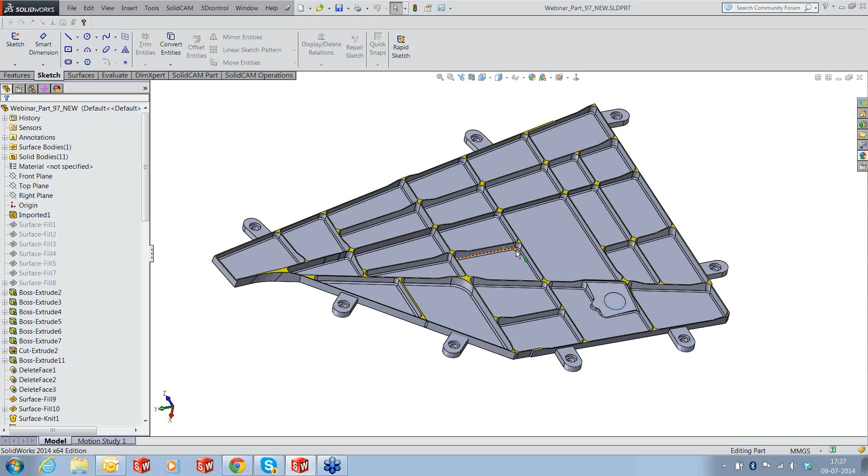You will also notice that I have colored the rib tops with a particular color, and this is for doing easy selection, which we are going to see in SolidCAM. It's a new thing where we're going to select surfaces by their color, so it becomes much more easier to select, and you don't spend a lot of time selecting these surfaces. Okay, let's start with new milling.

Yep. Yes. Okay. So let me.

We're going to use a Burmac, the Spanish machine, with a Siemens 840D controller. It's a head type machine.

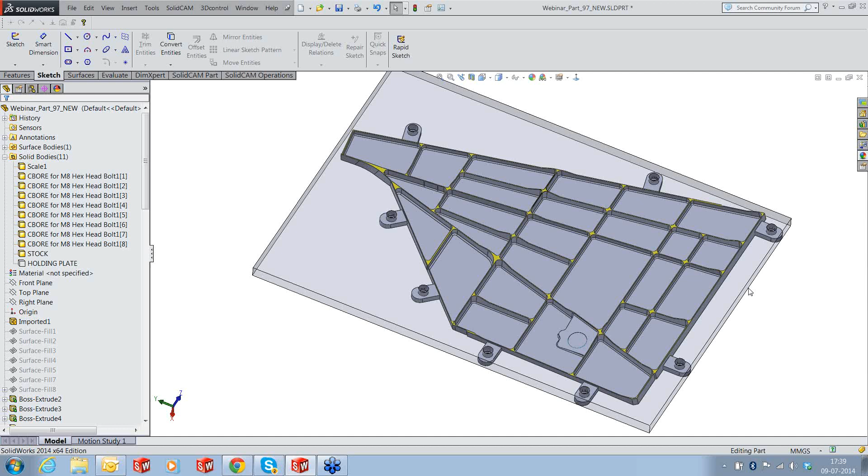So let me select Siemens 840D and set my coordinate system top of the center. Flip around Z. That should be my first coordinate system.

Put some values up here, 150, 25, okay, accept it. So we have our first thing done already.

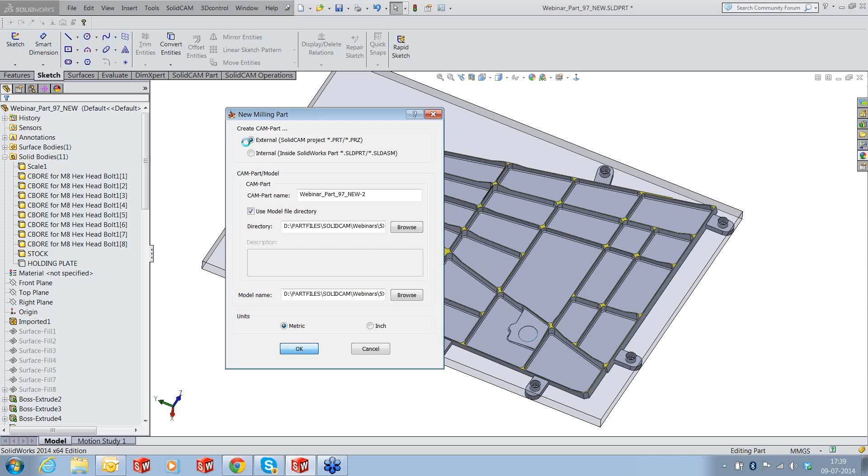We have set the coordinate system, and you can see that the target and stock are already defined, although I don't know what they are. We can always go back and change this.

Now, since we are going to use iMachining, I need to set some of my parameters for iMachining, like the machine. Then we have the material, etc. So I'll accept this.

I'll exit for a moment because I just need to change the version. Okay, just a moment. Again, please.

Okay, let me open the same part.

I have now defined my coordinate system and stock and part, but we just need to recheck. So I'm going to check the stock again. A lot of solids have been selected. We don't need them. I'll unselect all, and I'll only select this particular CAD data with a tolerance of 0.1.

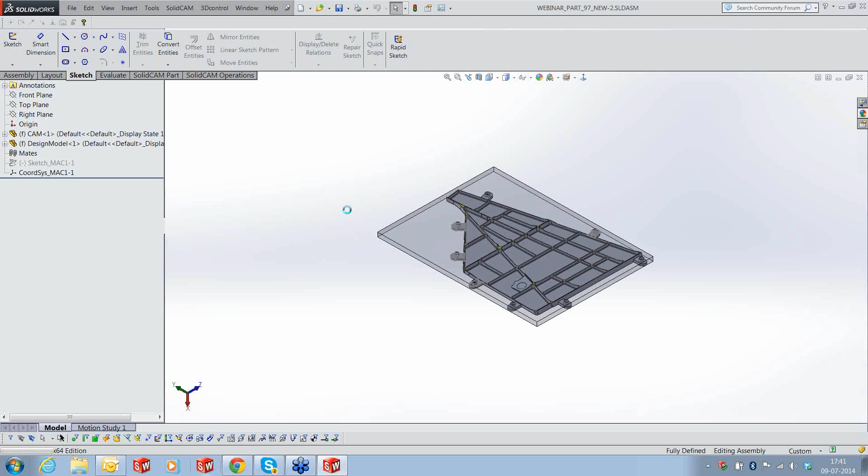Right, so we have already done the target, stock, and coordinate system definition. All we now need to do is select the right machine, so we're going to select Burmac.

It's the head gantry type machine for such big parts, which has a maximum spindle RPM of 12,000, a maximum feed rate of about 12 meters, and a spindle power of about 22 kilowatts.

We're also going to use aluminum 6061-T6. This is aerospace grade aluminum. So we are going to use these two things, the machine Burmac and 6061-T6.

So I've already set the parameters for iMachining. Now what I'm going to do is switch on again my stock because now I'll need it for my first operation. My first operation is actually going to be clearing out the material, not from inside but from the outside. I need to remove the material from outside.

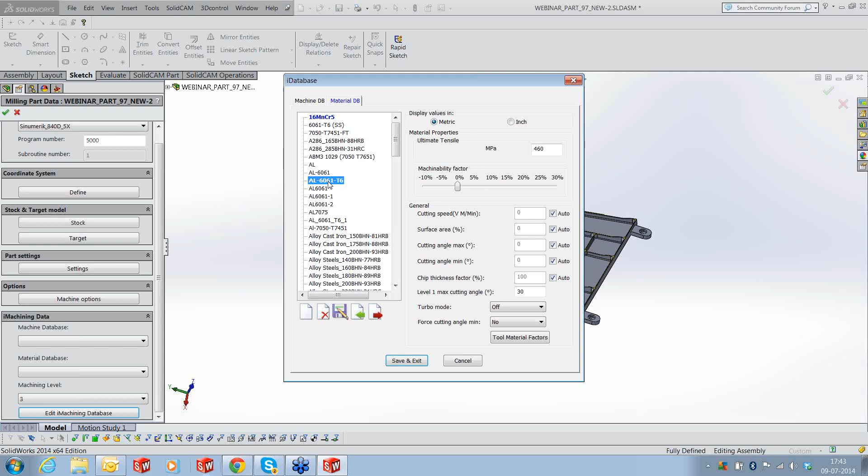So I'll add a 3D iMachining. In this case, it's not going to be the target because I need the lugs back with me. So I need to define the material other than the lugs.

So I'll just hide for a moment the stock and define a new target. This is going to be a local target. It's only going to be valid for the function where it is selected. It's not a universal target.

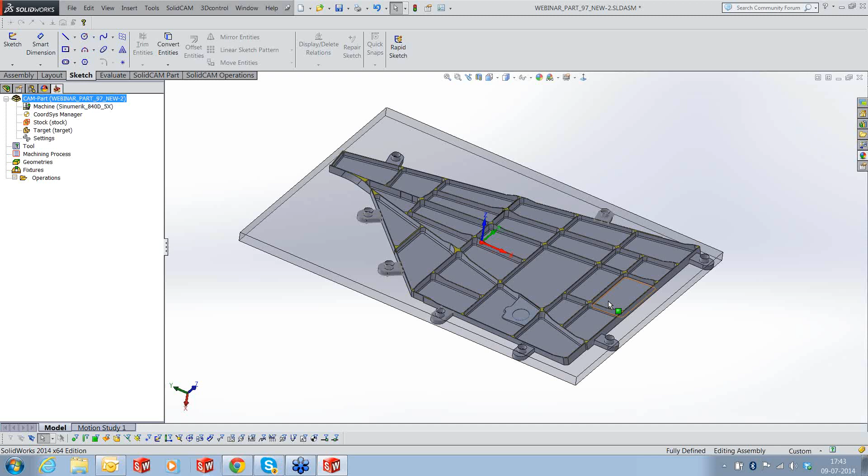So I'm going to select all the lugs, selecting all the lugs together. These will form the part of the material so that we don't end up removing the lugs. It's needed for us.

Okay, I'll select the tool. For this operation, I'm going to use a 20 millimeter end mill, 60, this is 50 and 35. It's a 3-flute end mill, 45-degree helix. Let me change it to 35 degrees. Holder: I'm going to use a HSK 63 holder. That's how my tool looks like.

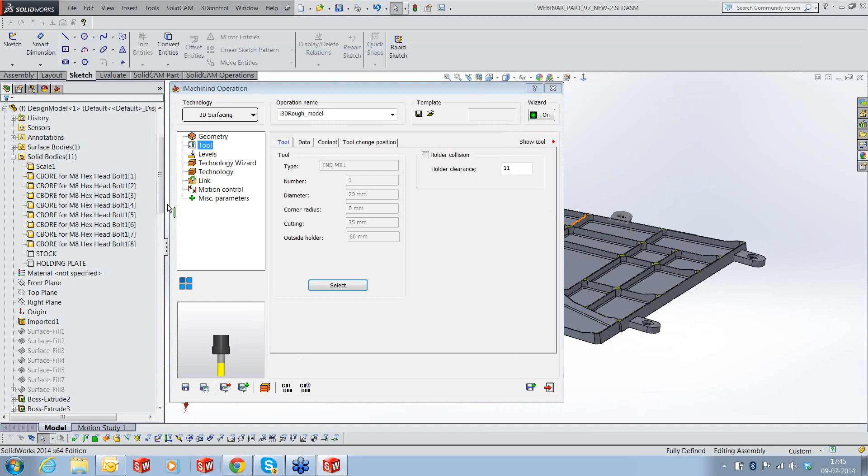Okay, right, now let's get the stock back again because in the geometry, since I want only the outer portion to be machined, I need to now tell iMachining that I just want the outer area to be cut. So I'll define a working area.

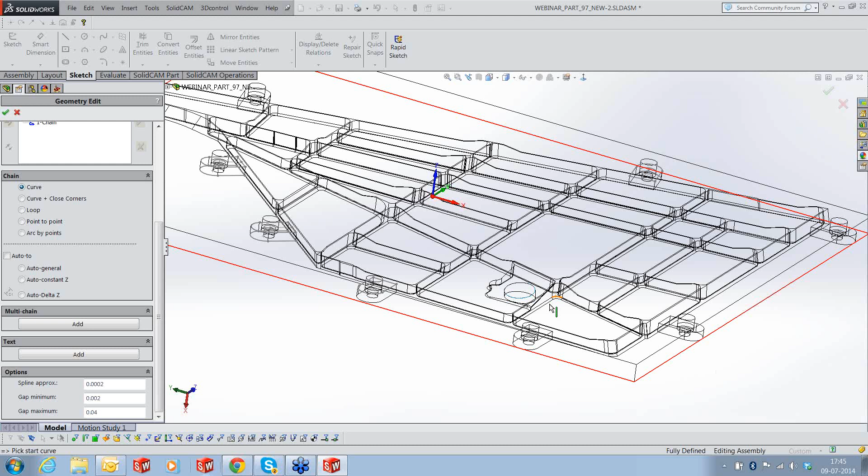Constant Z. Go into the wireframe and select the innermost curve. Again, constant Z. So we have two curves selected, the outer and the inner. The area between them is the area to be machined. And the outer curve can be marked as open because the tool can approach from outside.

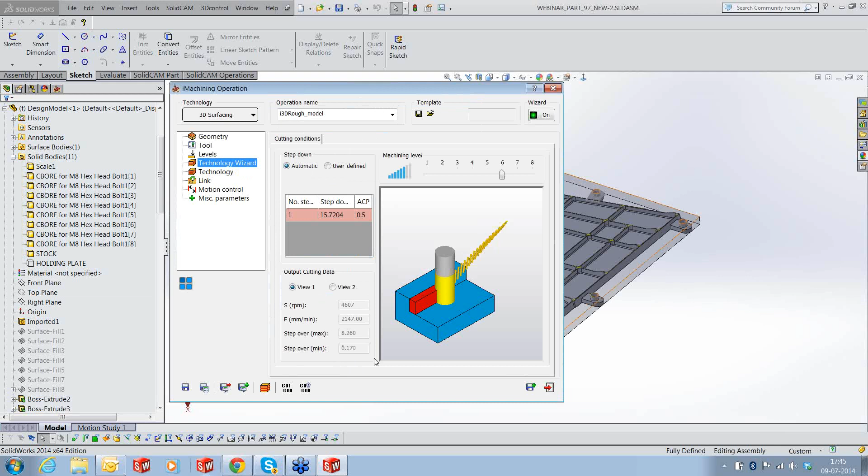Technology wizard, we are at level 6. These are the parameters that iMachining has calculated by itself for level 6 dynamic parameters.

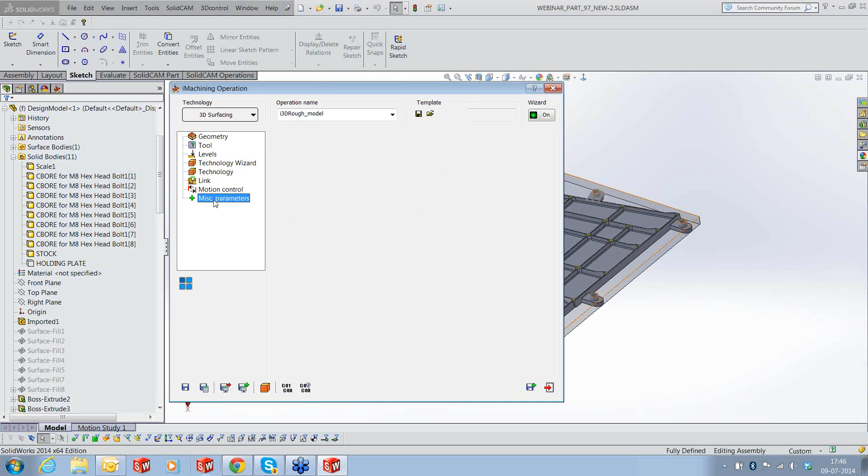Technology, I'm going to keep an offset of 0.8 or 1 millimeter. A tool path tolerance of about 0.2, because I'm just going to keep about 1 millimeter offset, so 0.2 is good enough. Once that is done, let me save this operation.

Go out here and calculate it. So it'll take about 20-25 seconds.

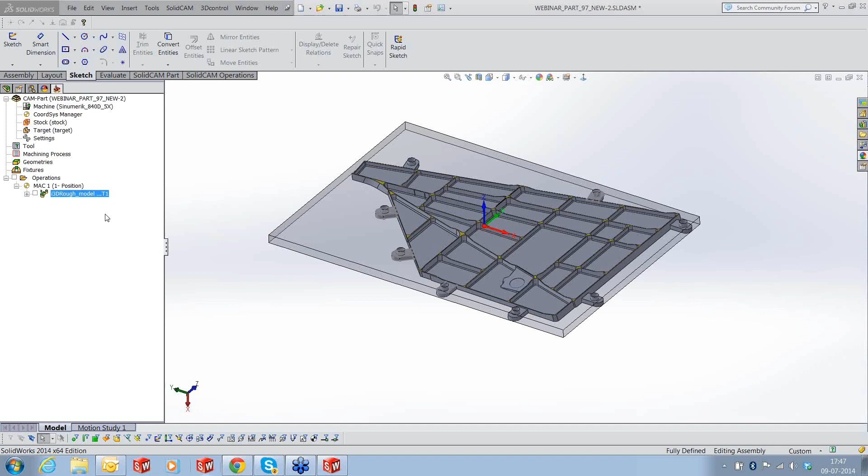Okay, so calculation is all done. If I look at the tool path, let me switch off the stock now. That's very nicely done from the outside. It's not machining the inside at all. So if I run the simulation, solid verify...

This is how it looks like. The lugs are as they are, they're not cut. At this level and below, I have the screw. So the upper area, 3-4 millimeter, can be cut, no problem.

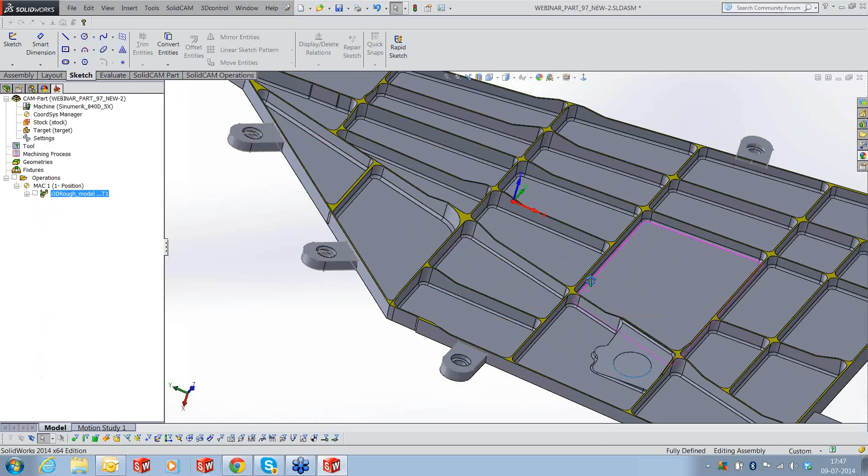All right, so we have the first roughing that's done for the external. Now, before I start opening up the internal pockets, I actually have to rough and finish out these ribs. These ribs you can see are not on one level, but they are changing. They have a shape to themselves. The ribs have to be roughed and finished. I can't leave it to later because...

Once I scoop out the material from here, I'm actually going to have a very weak edge or very weak rib on which if I put my cutter and run it at even a speed of about 1000, it's going to vibrate, it's going to bend, probably it's going to break, even damage the part and the tool itself. So the ribs have to be roughed and finished even before I scoop out the material from the center. That's going to be my second operation.

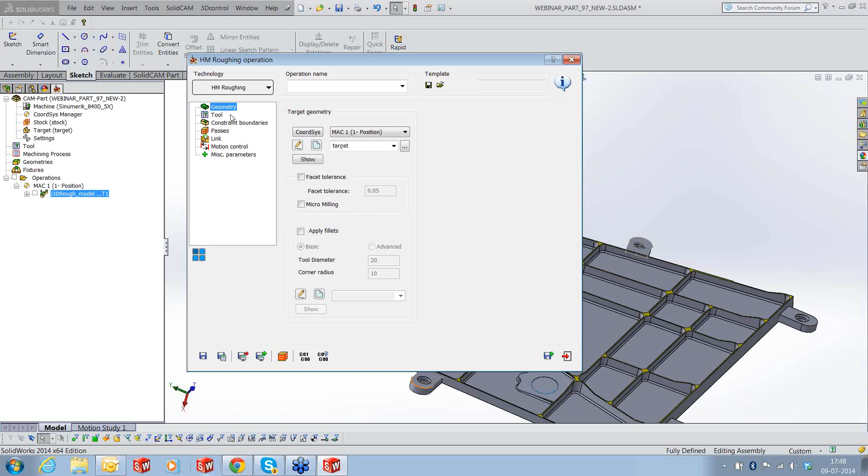So I'll add a 3D HSR, sorry. And here I don't care if I'm going to use the target model or the local model that was used for iMachining, because I'm going to be within the part. Sorry, I'm going to select a 10 millimeter ball nose end mill because it's going to be on a very small area.

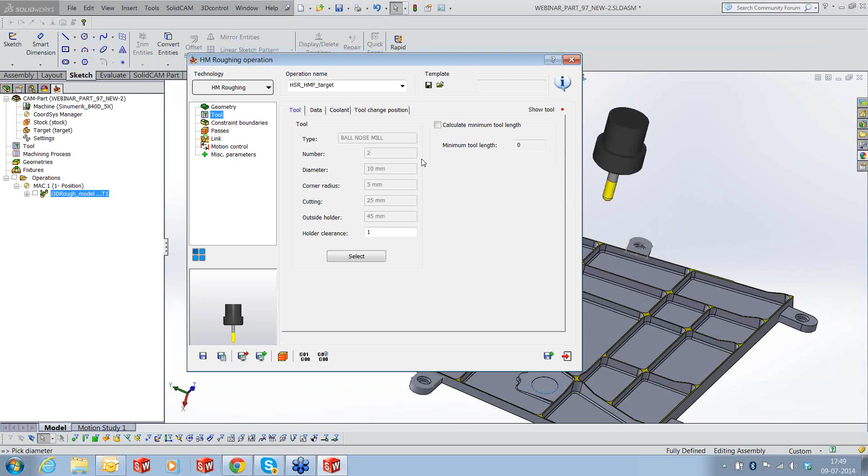45 millimeters out of holder, 25 is my cut length, 2 flute. Select the tool, constraint boundary. Okay, sorry, this has to be contour.

We add the tool again. 45, 25, 2. Okay, that's done.

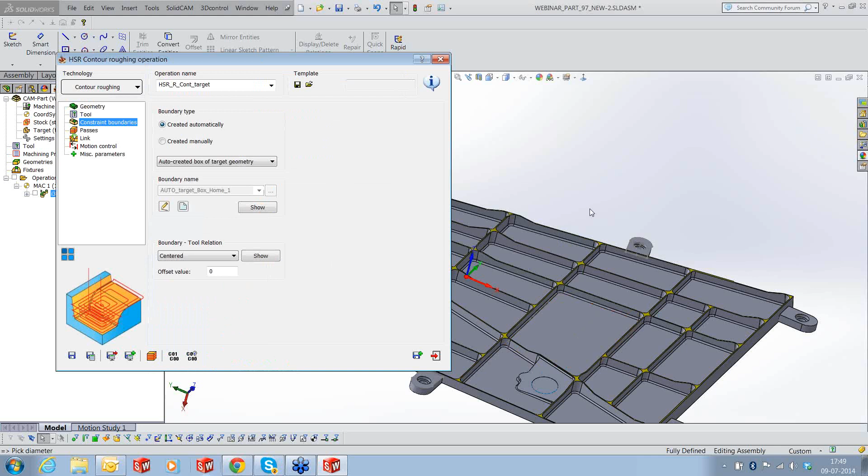In the constraint boundary, because I want to cut only the ribs, I have to define a boundary that's including only the ribs. How do I do that? Simple, I'll create the boundary manually using the selected faces.

The faces are now going to be selected, but since there are too many, I can't select them manually, it's going to take a lot of time and effort. So I'm going to use the new function of SolidCAM to find faces based on a typical color. The moment I pick a color, SolidCAM records the RGB value of that particular surface, and when I hit find face, it recognizes all faces with a similar RGB value.

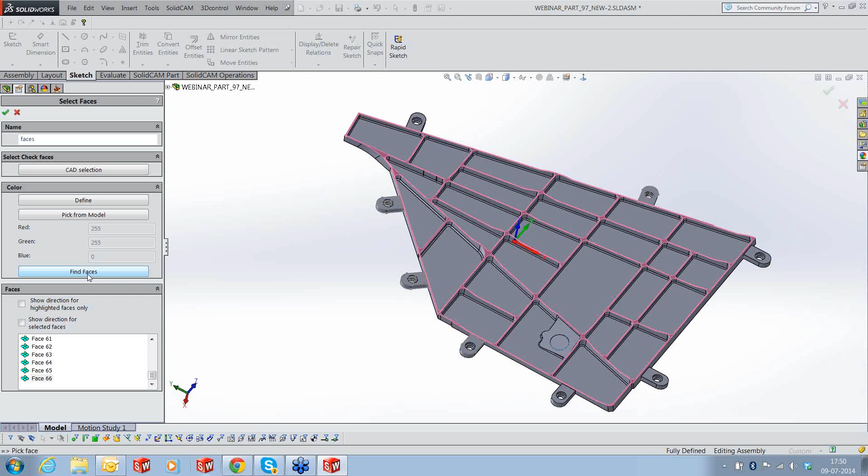So it's now selected 66 faces in less than a couple of seconds with the same color. It's almost selecting all the ribs. It selected all the ribs. And I would like to give an offset of about 1.5 millimeter and create the boundary.

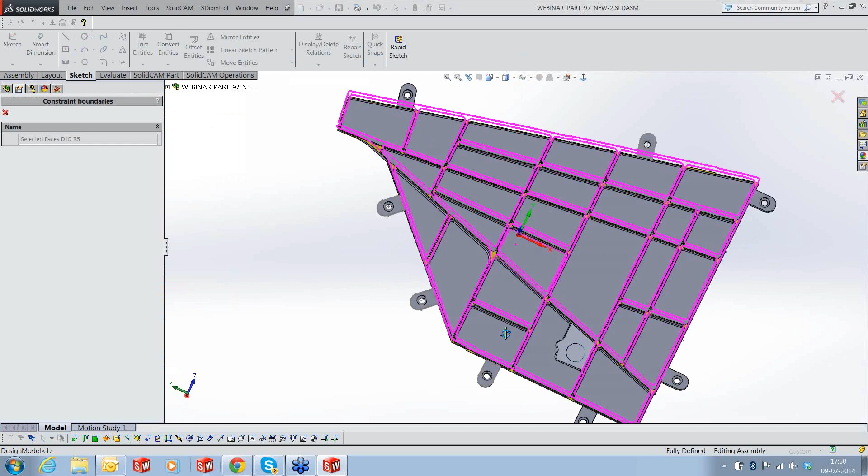So if I click on show, you can see that SolidCAM has nicely made the boundaries for machining only the rib tops. Okay.

Onto the process. Keep about 0.5 millimeter for my finishing, 0.1 as my offset, step down of about 0.7, a minimum offset of 2 and a maximum step over 3.6. Refine corners, no adaptive step down. Ramping of 5 degrees with 1 millimeter offset. Profile, retracts minimum, clear the surface by 10 millimeters. All right, that's all that's needed.

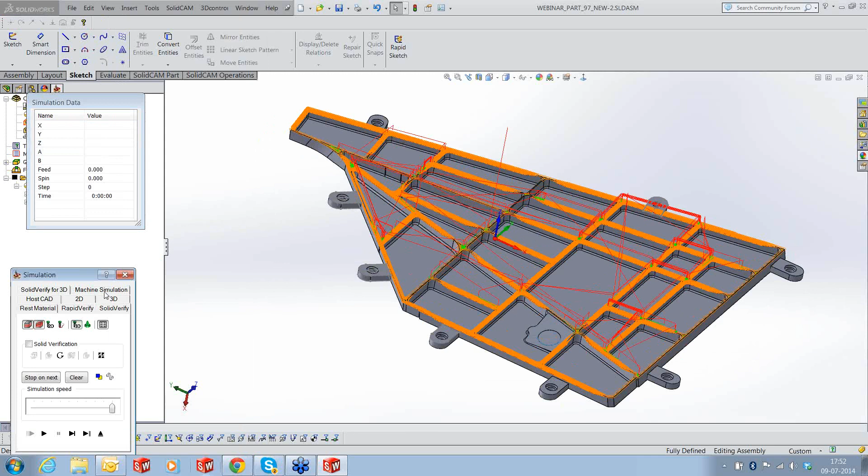All right, the calculation is done. Let's switch on the toolpath. That looks nice. If I now run the simulation, solid verify, switch off the holder and run the toolpath, you can see that it's machining just the rib tops.

Of course, instead of using a ball nose, I could have used a bull nose or a flat end mill, but I prefer to use a ball nose.

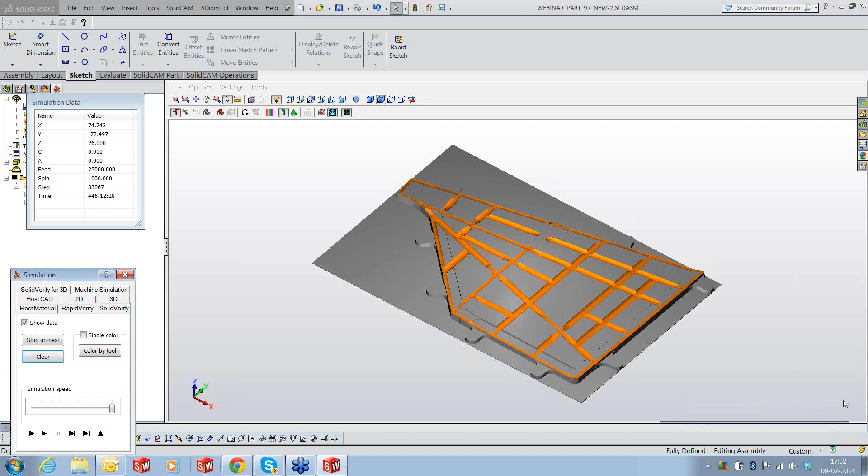All right, so it's done the roughing of the rib tops. All I need to do now is finish the rib tops. So what I will do is add another operation for HSM and use the 3D constant step over. The tool remains the same. The drive boundaries is also the same as roughing. In the constraint boundaries or the part boundary, I'll have to recreate the same thing.

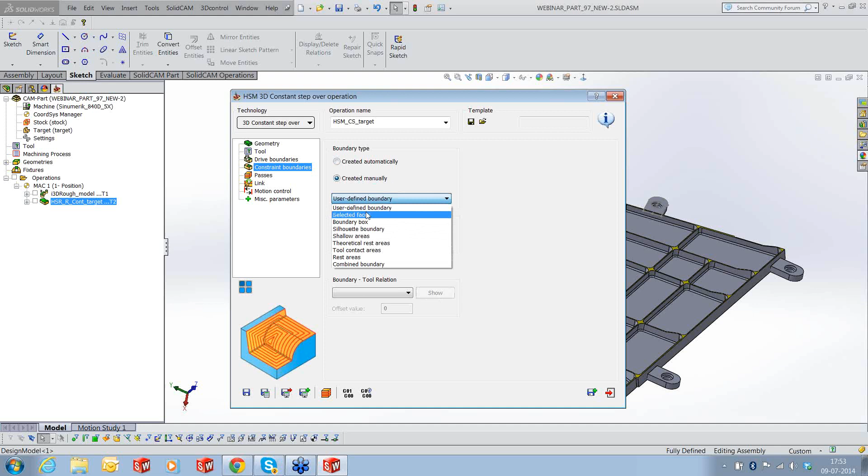Define, pick from model, find faces. Okay, offset of 1, that's where my boundary offset is.

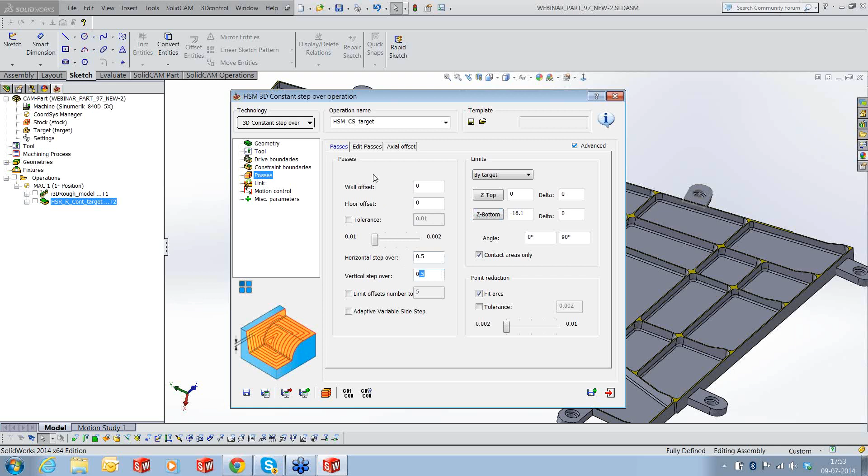In the process, I'm going to keep about 0.5 millimeter side step both on the vertical and horizontal. Okay, link, retract 10mm. Let's save and calculate this.

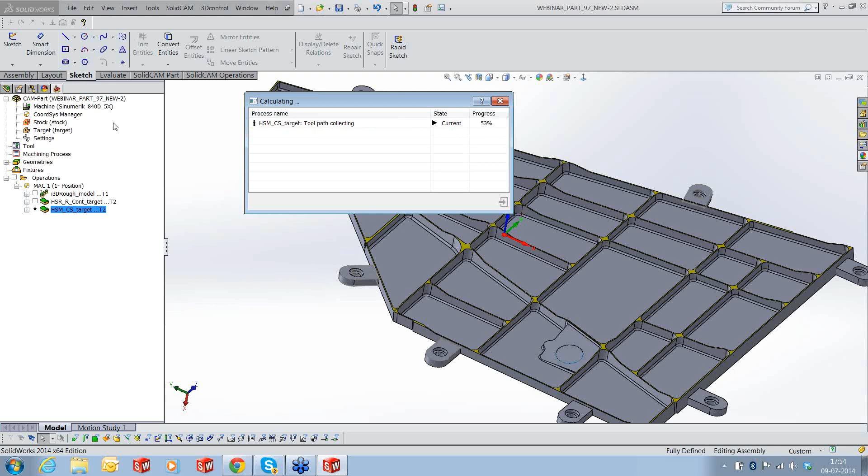Okay, that's done. Let's check how the toolpath looks like. So that's how my toolpath is going to look like. It's running only on the ribs, doing nothing else.

Okay, so once we have roughed out the outer area, roughed out the ribs, and finished the ribs, it's now time to get inside to the pockets. So I'm going to add another iMachining operation.

And this time I'm going to use a different tool. I will use a 20 R1.5 bullnose, I have a corner radius there of 1.5. 50, 35, 3 flute, holder, HSK.

All right, the geometry however cannot be target. It has to be the model again, because otherwise it's going to cut off the lugs. So we have to use back the same part that was used earlier for roughing.

Okay, levels, offset of 1 millimeter. I don't want to keep very less offset because of the issues of warpage, so I would like to keep some material and then gradually remove that material using swarfing to overcome the issues of warpage.

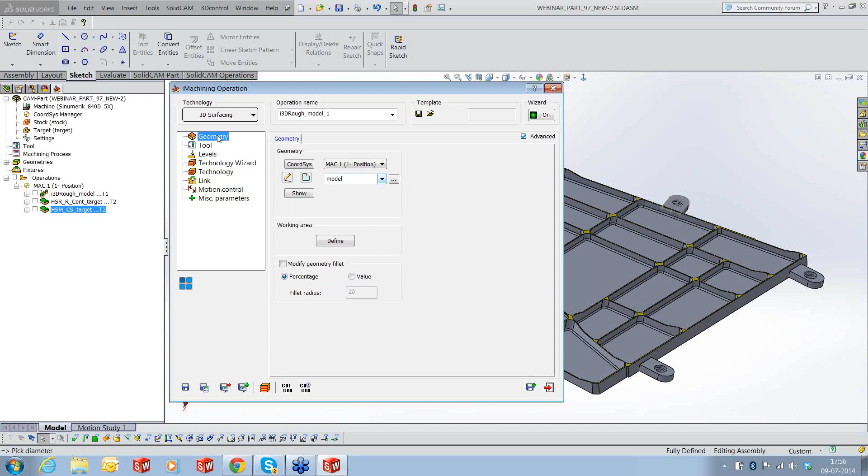Okay, let's save this and calculate it. This would take about a couple of minutes of calculation because it's a pretty large part.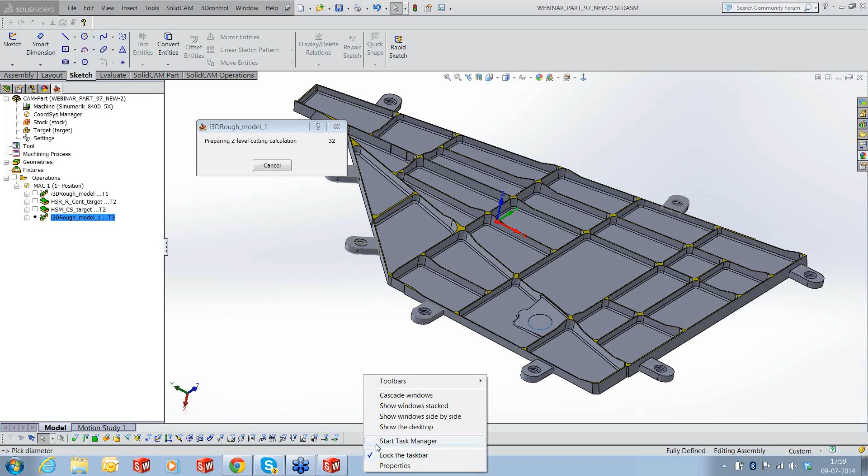Okay, I think I made a small mistake here, that's the reason it's taking such a long time. Let's kill this process and start it again. I gave it extremely tight tolerance to calculate, and that's the reason why it's taking such a long time. Because since it's a roughing toolpath, the tolerance need not be so tight.

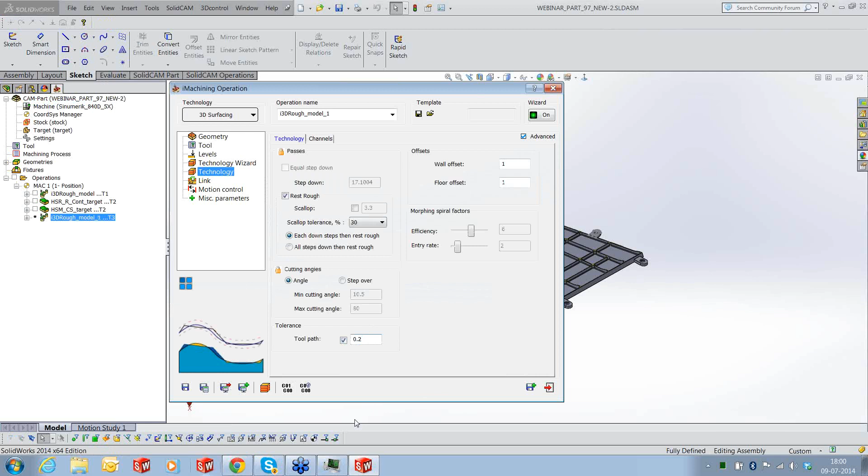If you look at what tolerance I've used, going to the technology, it's 10 microns. It's too much for this toolpath. 0.2, that's what I gave earlier for the other toolpath. Let's calculate this. This should take about a minute and a half to 2 minutes. Sorry for it.

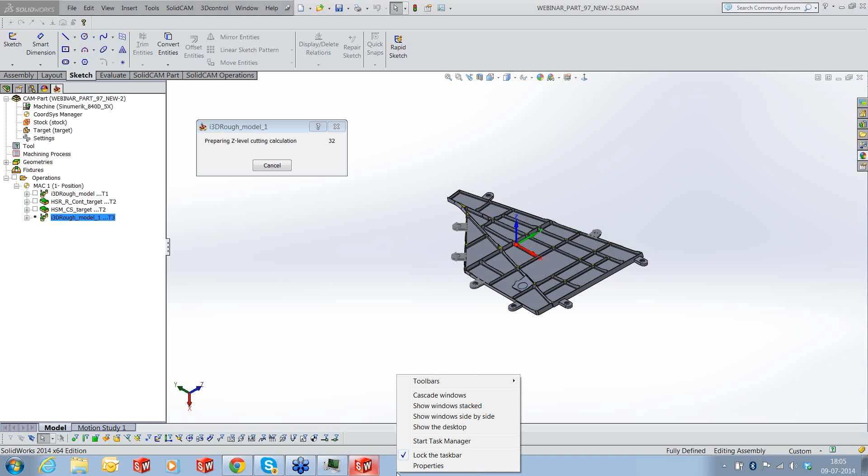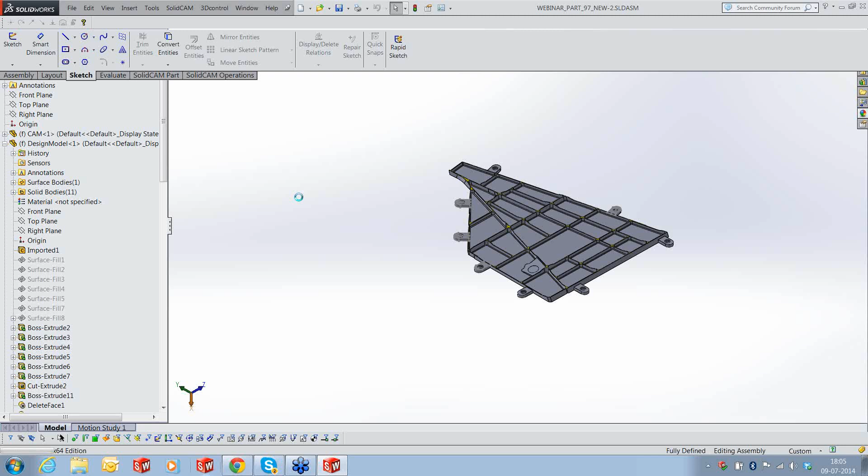Okay, for some reason it's not doing it. Let me see what was the issue. It's fine. So it's fine. Yep, everything is fine. Anyway, we'll just suppress this for a moment.

And let's go and check the swarfing. So once we have the roughing done, I'm going to open another part and show you what that result looks like. In the meanwhile, let's go on to the swarfing part.

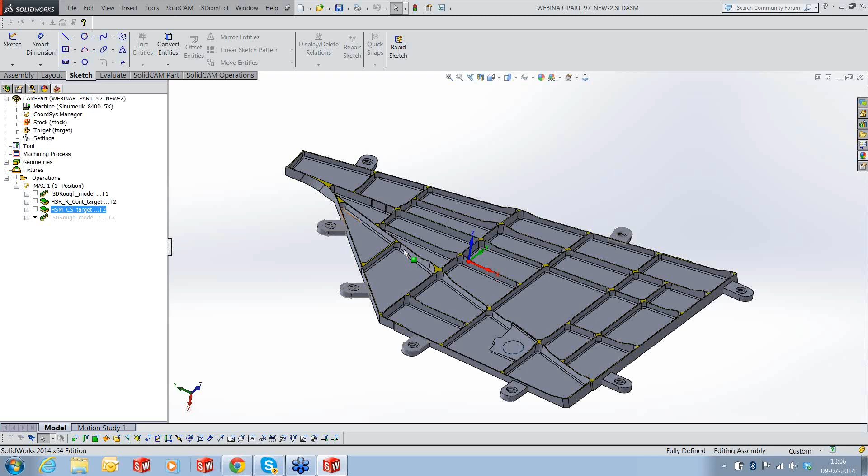So once we have the roughing done, we need to finish up these walls. To finish these walls, there are many ways. Some people do it in 3-axis, using a disc type cutter to overcome the undercut and finish the part. Some people do it in 5-axis, where you can go using down steps, or use a single cut, just using the flute length and cutting with the side of the tool the entire part in one go.

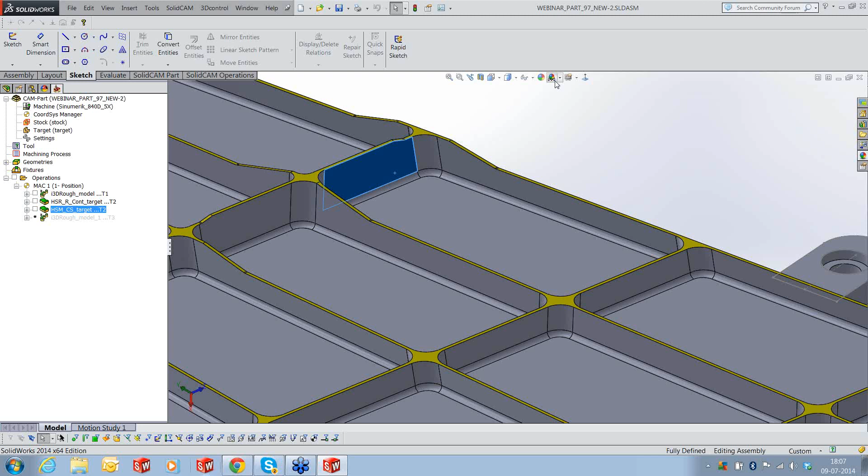That's possible, and generally that gives a much better result, a much better surface, and the fastest machining time. Now in SolidCAM, with swarfing, you've got the advantage that you could directly create the toolpath without having to create much geometrical modification. So you directly select swarf in the geometry, select the swarfing geometry.

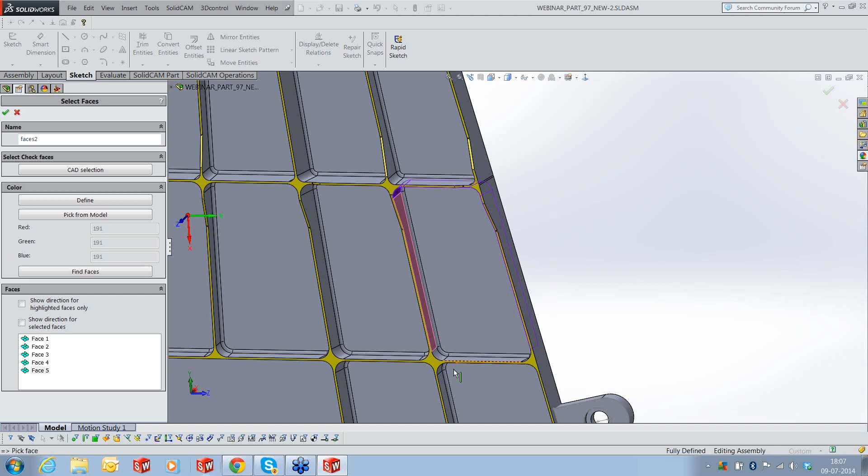So let's select the faces, and this face. Okay, and the floor will be up here. These are the surfaces that will act as the floor geometry.

Okay, the tool, since it's going to be a very small depth, I'm going to use a smaller tool. I'll select an 8mm ball nose. I'll create an 8mm ball nose, 28mm cutting length, 2 flute. Okay, select.

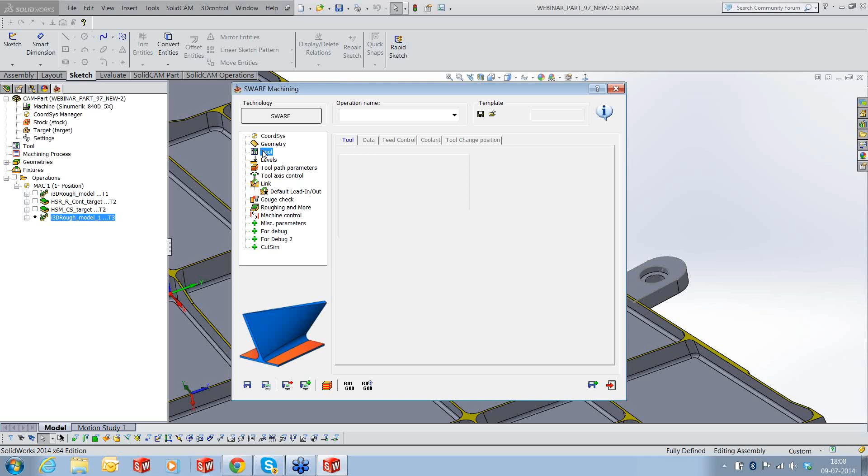Entry and exit safety distance of 10mm each. I would like to cut it inside. No changes to the tool axis control. We will see some options on this when we do the machining.

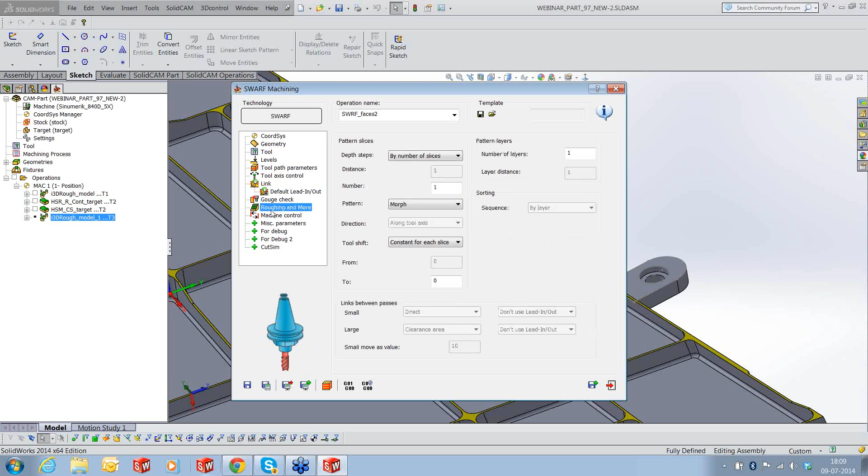Let's save and calculate this toolpath. The calculation is also pretty quick because it doesn't have much parameters to deal with, since most of the things are automized inside. So let me run the simulation. So that's how my tool will enter.

Of course, before we start the simulation, let me put in some leads and links. So I'm going to put a lead in with 1mm height, and a lead out also with 1mm height. Okay, save and calculate. Let's run the simulation. So we have a nice lead in and a lead out now.

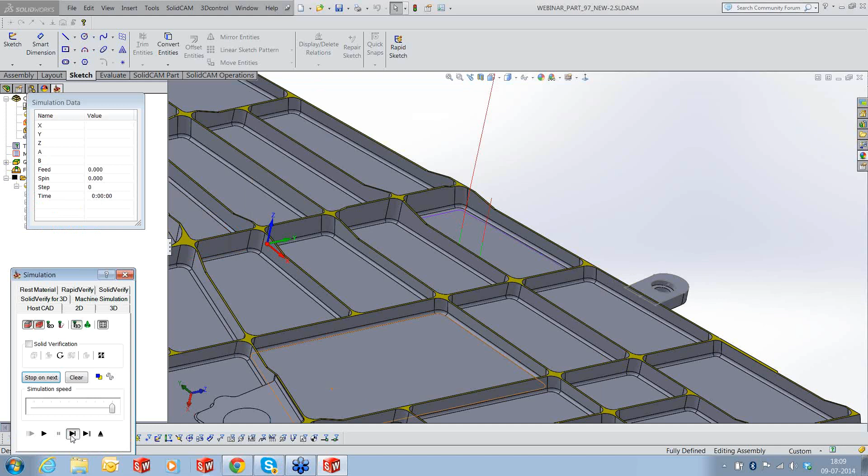There's not a nice thing happening in the corner. Okay, we noticed our first problem. Goes to the second one - it's also not a pretty sight. So it's giving me a couple of issues.

Okay, let's fix the first issue of this tool dancing around the corner. It's pretty simple - go to tool axis control, minimize the rotation axis changes, and calculate it. Now let's run the simulation. We should have a much better tool path, especially in the corners. Yes, it's much better.

Yes, nice. But now we have a couple of issues here. You can see that my tool is trying to tilt and then straightens up to continue to do a better job. So we do have problems in between which need to be fixed immediately. So how do we do that?

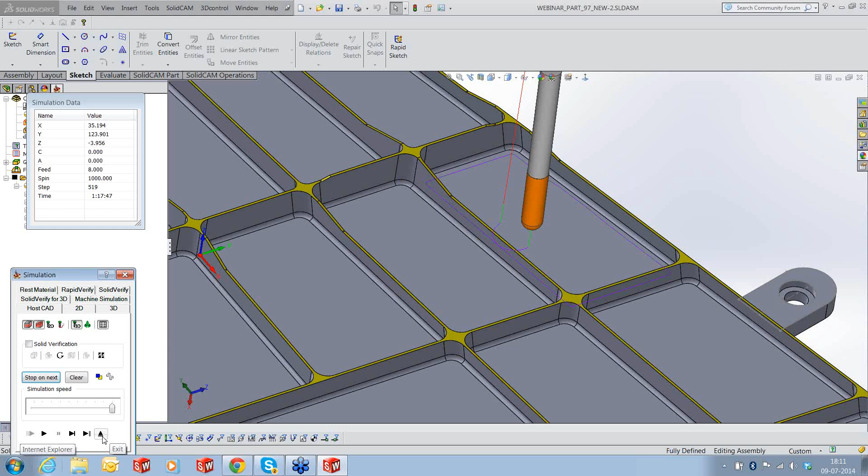We know that we have an area up here that's having a problem, so let's say from this point onwards to somewhere up to here. So what I'm going to do is, this is where SolidWorks comes into picture. I'll create a 3D sketch and drop 3 straight lines - one over here, another one over maybe here, straight line. The length doesn't matter because what matters is only the direction of those lines. Okay, so I have 3 lines, so I'm going to edit this toolpath.

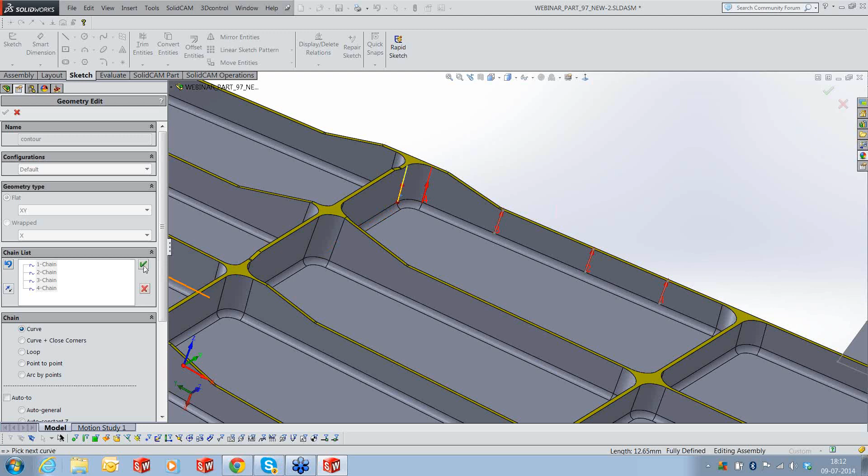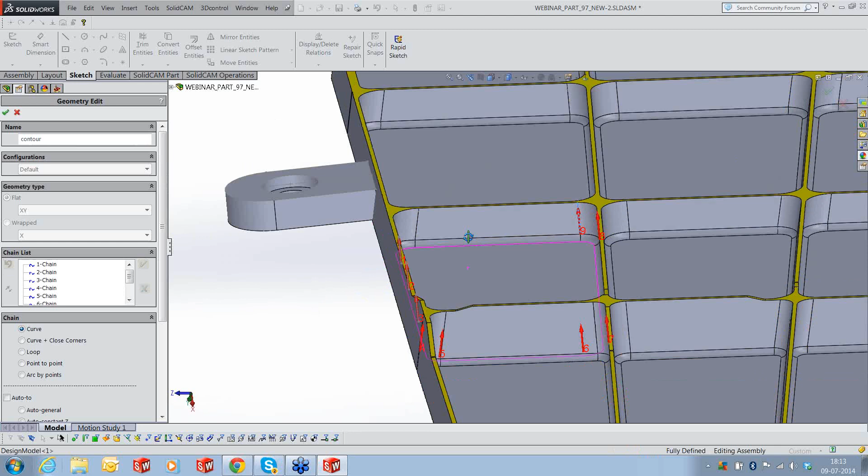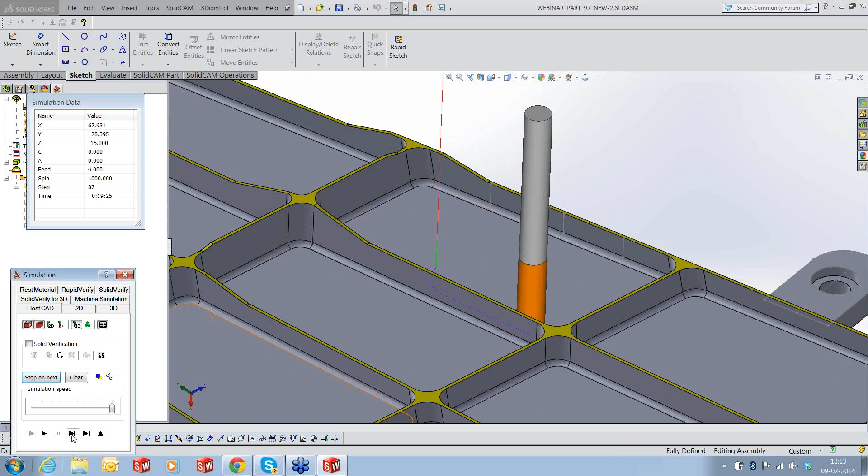Okay, let's simulate now. So now if I look at the simulation, things should be much better. Right. Okay, I can see that it's not trying to tilt itself. It's following my instructions of taking these 3 lines into account while it's moving around the surface.

Now these problems can occur mainly because when you try to work on imported geometry, sometimes surfaces can have issues. Instead of modifying the entire surface geometry, we only modify the tilting geometry in such a way that the tool doesn't do what it wants. Now you could have not just 3 curves, maybe 5 or 6, you could get a much better result.

Now I don't want to remove the

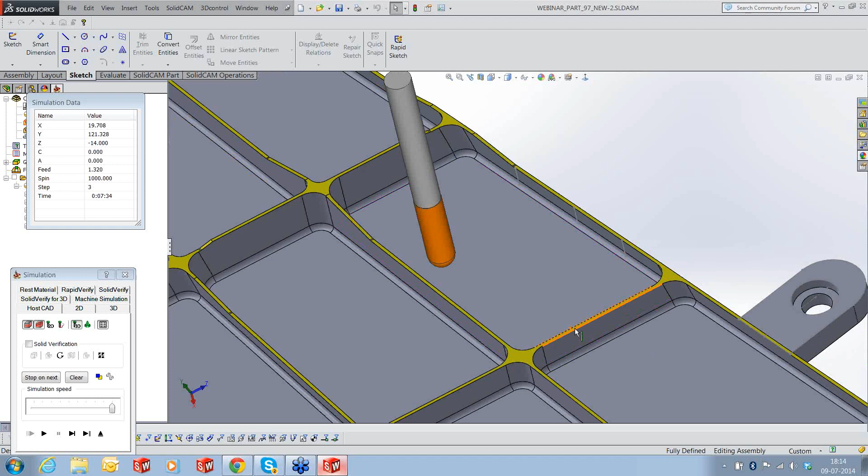Going to add 3 layers of 0.25 each, so it's going to remove 0.25 material at every pass, and I'll blend a spline between these 3 tool paths. Okay, that's done. If you look at the tool path, this is how it looks - I've got 1, 2, and 3, each having 0.25 step over.

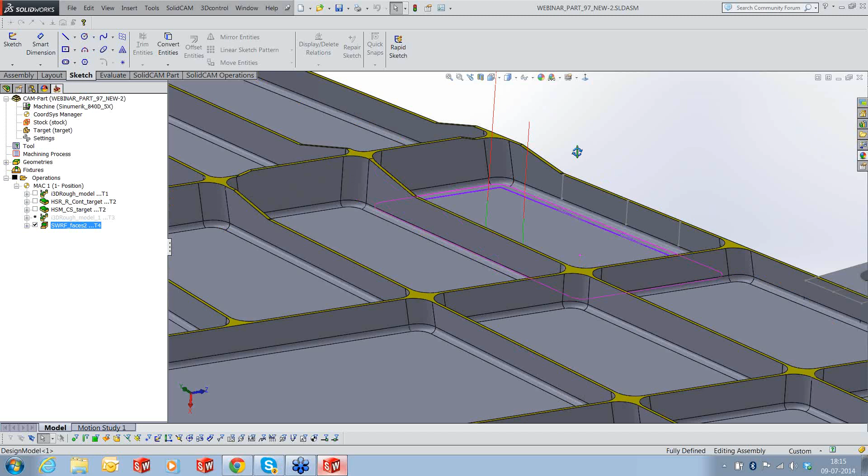So I'm going to gradually remove the material. I'm not going to remove the material in one go - it's going to be slowly shaved off. Now instead of going in one go, if my customer would like to take a number of cuts on the wall and not just single axial cuts.

That also is possible. I'll edit this. I'll go to the layers. I'll say this is 1, and here I'll say I want 10 cuts on the wall, and they have to be morphed with the upper curve and lower curve. And I'll calculate this.

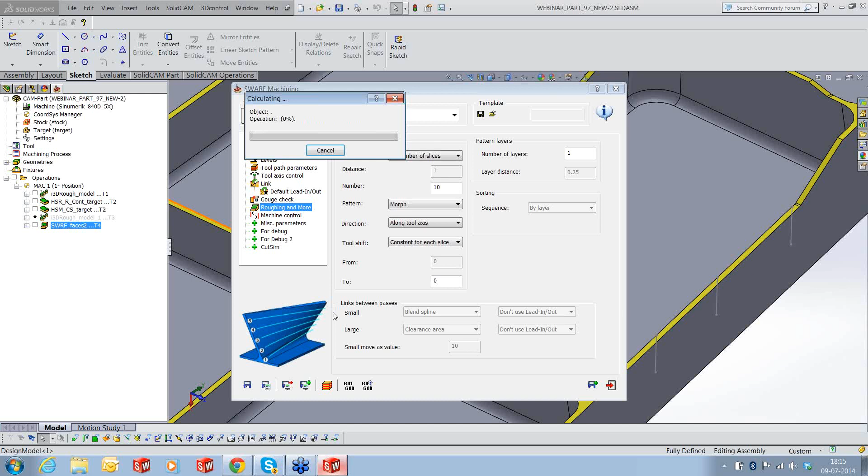Right. Now if I look at this simulation, on this toolpath, you can see that it starts from the upper edge and goes all the way down to my lower edge by number of passes. So the entire width of that surface is divided into 10 equally spaced passes.

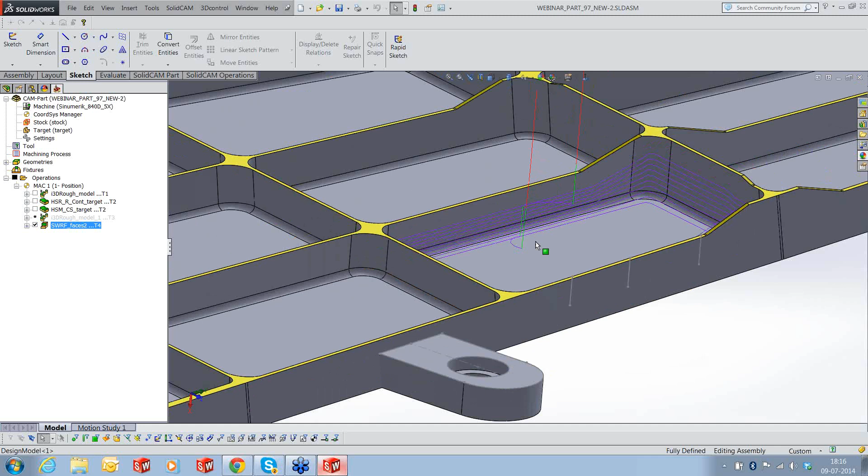So I have a possibility to do both - I have a possibility to add axial depth of cut, and I also have the possibility to add radial depth of cut. Right, let's make this again what it was. So roughing, this is 1, this is 3. Calculate.

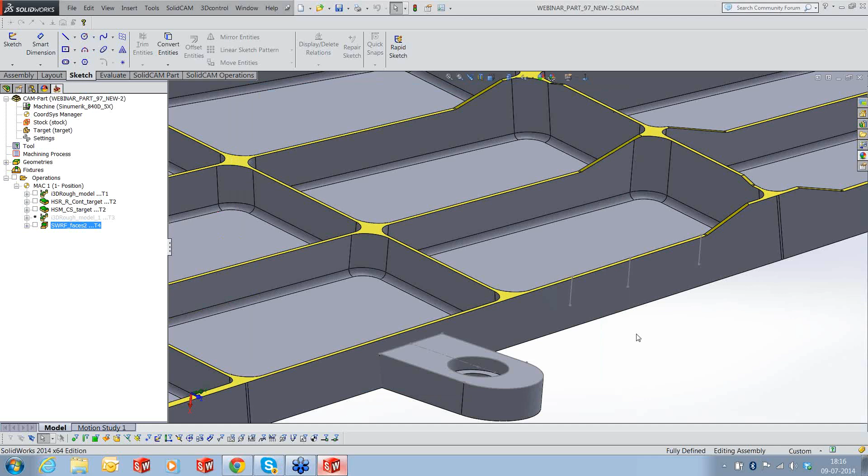Okay, so we have this toolpath. Now I have finished the wall, and to some extent a couple of passes on the bottom surface. The bottom surface still has material - we still have 1 millimeter of material on the entire bottom surface.

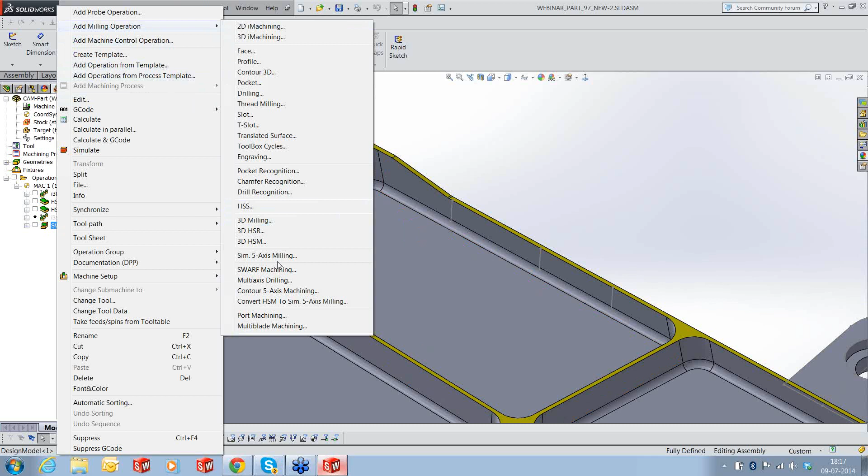Now what I'm going to do is create another kind of toolpath that will machine the floor surface. So I'm going to add simultaneous 5-axis milling parallel to surface. My drive surface is this - this is the surface that I need to machine, and my edge surface or the tool has to be parallel to all these surfaces.

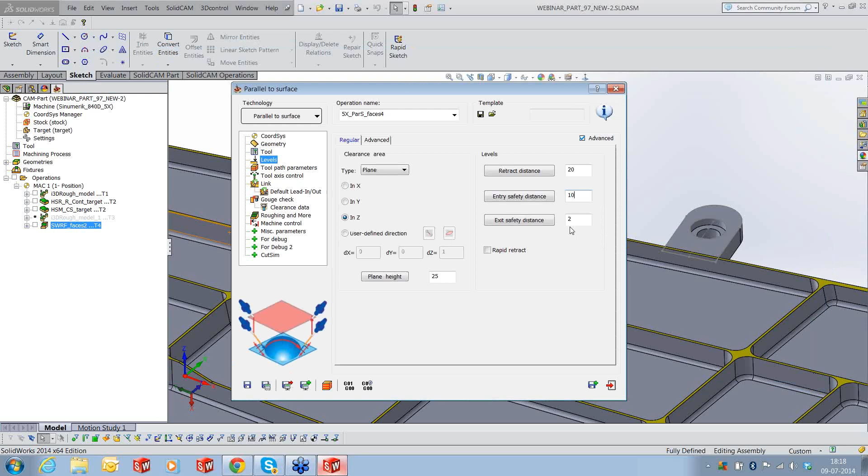Okay, this and this. So we've selected all the surfaces. If I click on show, all the surfaces are selected. I'm going to use the same tool, 8 millimeter ball nose, levels 20 and 10, and we're going to create some 20 cuts, with a step over between each cut of about 0.5 millimeter, and it's going to be a spiral. I'm not going to change anything with the tool axis control, and in the geometry I'll add the tool radius. Let's calculate.

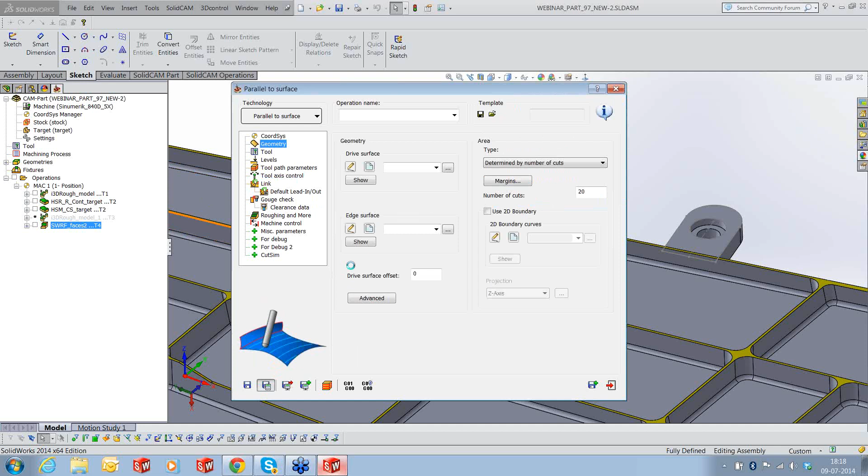So we have a tool path that runs, but it's not yet checked for gouges on the side surfaces, so we need to do that. First I'll reduce the step over to about 0.35 and go to the gouge check, switch it on.

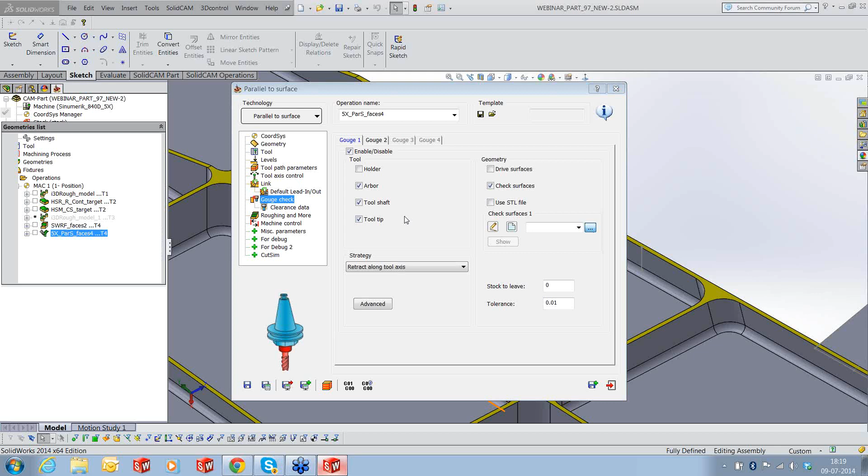We're going to see a new type of gouge check today. I'm going to check against the check surfaces, basically these surfaces. I'm going to tilt the tool with maximum angle. However, there's a new thing coming up in SolidCAM in the tilting, called automatic tilting. SolidCAM will decide where it has to use side tilt, and where it has to use lead lag angles to avoid gouging. Sometimes it could use side tilt, sometimes lead lag, sometimes a combination. So a single toolpath can have all three combinations possible using automatic tilting.

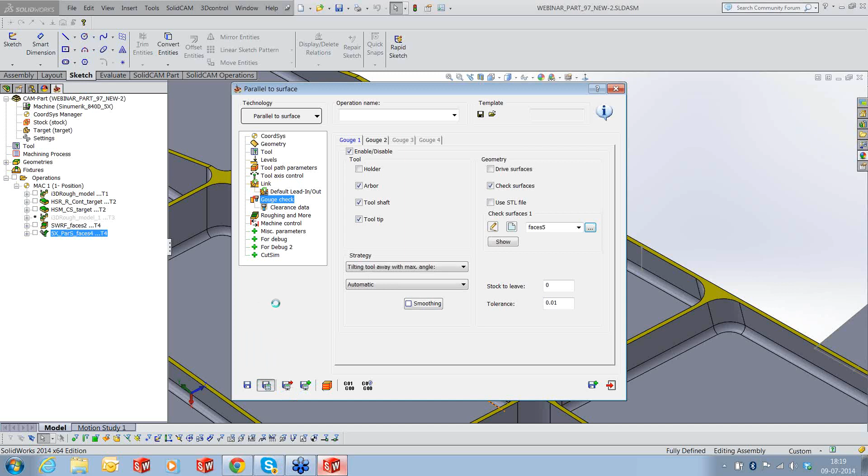All right, let's hit save and calculate. On the simulation. As we go closer, it's going to be much more visible. Let me go onto the side. As it goes closer to the surface, you'll see that the tool will start tilting. As it goes closer and closer to the surface, the tool starts tilting.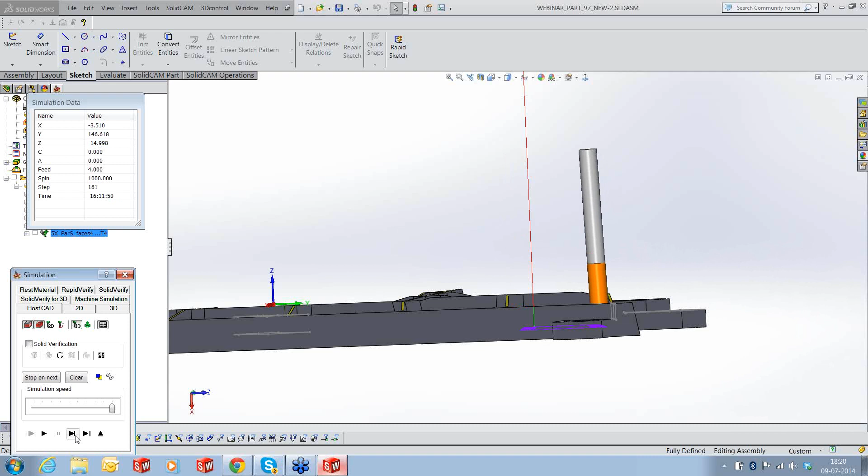You can see that the tool is using all three options of lead, lag, and side tilt. It applies depending on the situation what it needs to apply. At some point it could use a side tilt, at some point it could use the lead lag angle. So it uses a combination of all three options available to it.

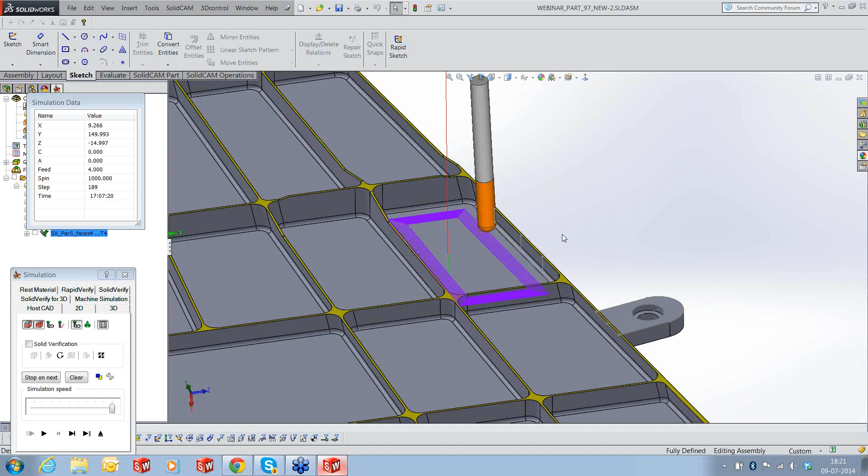All right, so we have done something here. Let's do the same swarfing also on the other side. So I'm going to copy this, paste it, edit, and select a new geometry now, for this surface here. All right, this is done.

The floor surfaces, of course. The advantage in using swarfing is it's very fast, and you can get extremely fast results even on the machine. You don't have to go through multiple depths of cuts and all those things. That's the major advantage you find with swarfing.

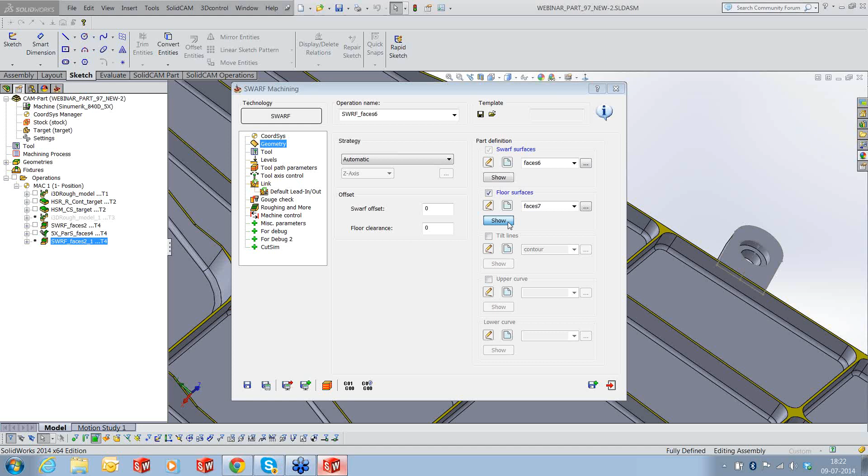So I have my floor and I have my swarf surface, or drive surface. I don't need to do anything else. Simply hit save and calculate, and I'll still get those three passes that I had defined.

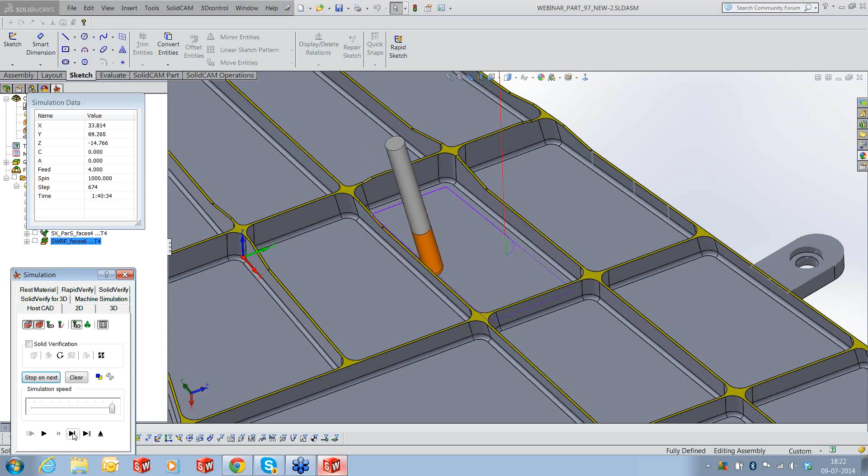You can see that this particular face has got a positive draft, so it's using the side of the tool to generate a positive draft. Then the second cut, and the last cut.

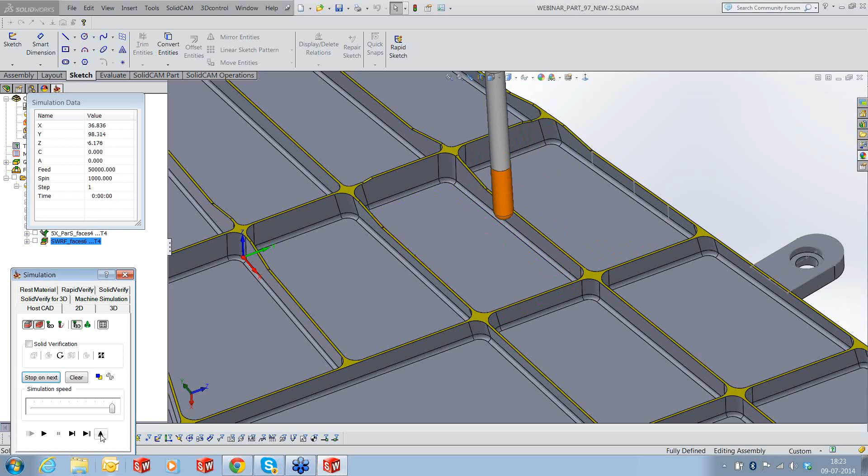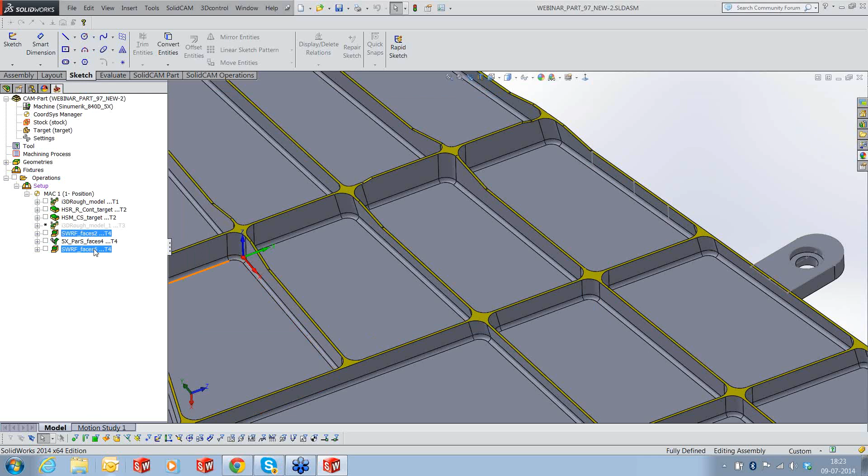Okay, so if I take this, all those three operations, let me switch off the... okay, it's off already. And if I take both the swarfing operations, let me first set the machine setup, sorry. Okay, control, simulate, machine simulation.

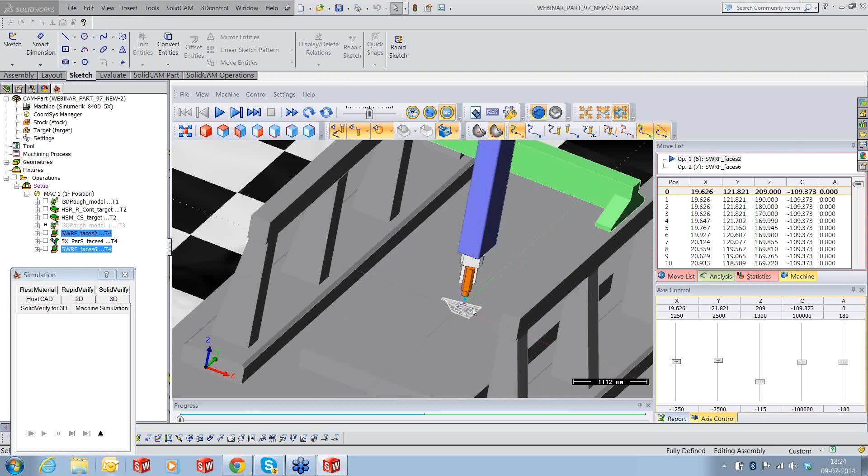Okay, this is how my machine would look like. It's a gantry type machine, head. Switch off the machine slide and run the toolpath slowly. Go to the next one, simply jump and run the swarf.

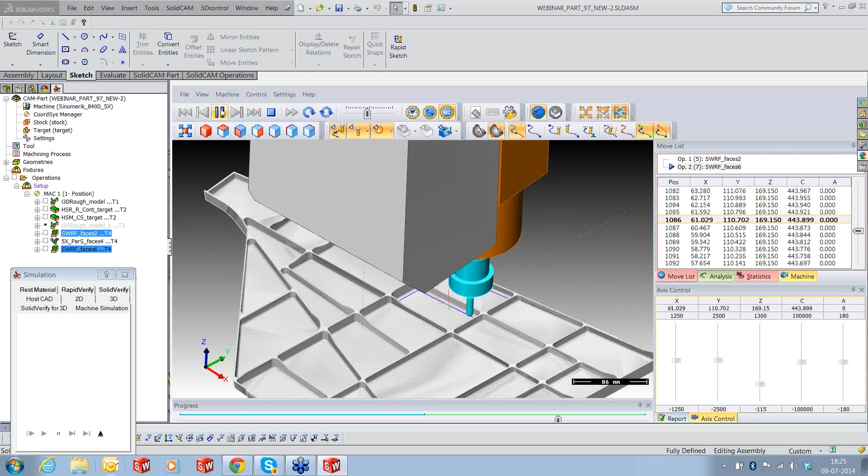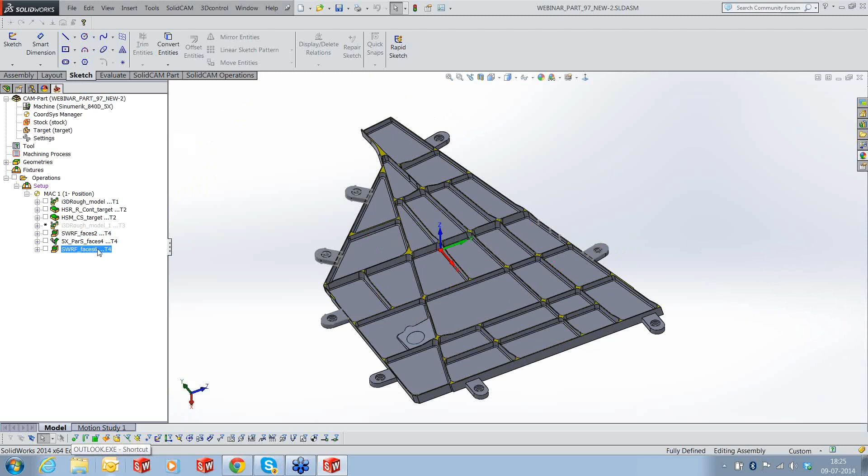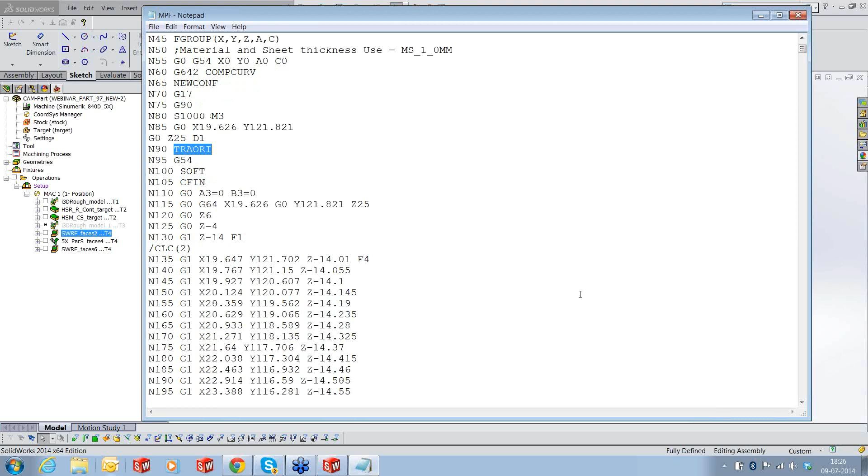Okay, that was about the machine. And if you look at the output coming out from the software, the G code for Siemens. Okay, and this is the output for Siemens. We use the TRAORI function for the RTCP movement, and if it's 5x, the output gives vectors in x, y, and z, and Siemens does the calculation for the angles. We can also output the angles, but this post-processor currently is equipped to handle vectors.

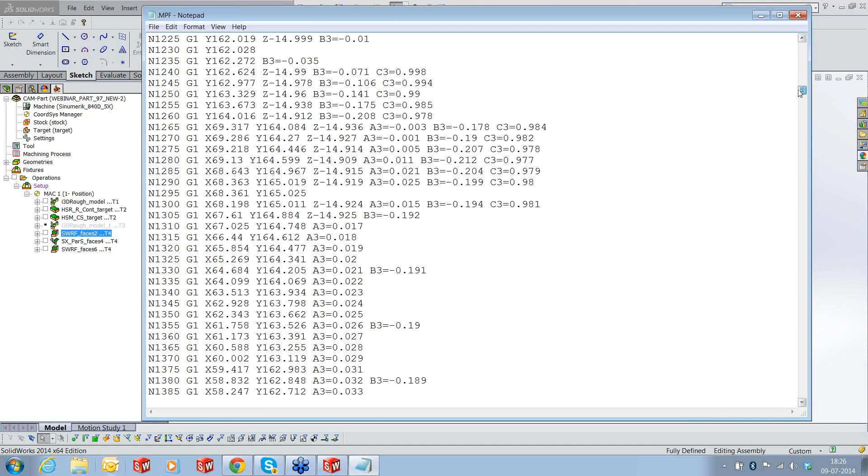All right, so I come to the end of the webinar, although it was not a great one because I could not calculate one of the main toolpaths for iMachining, but we will have a recording of this webinar, the one done before, where this toolpath was calculated. You can have a look on SolidCAM's website, maybe by day after tomorrow these webinars would be up and running. So if you have any questions, please ask me. If you can't think of a question now and would like to ask one later, you could write to us.